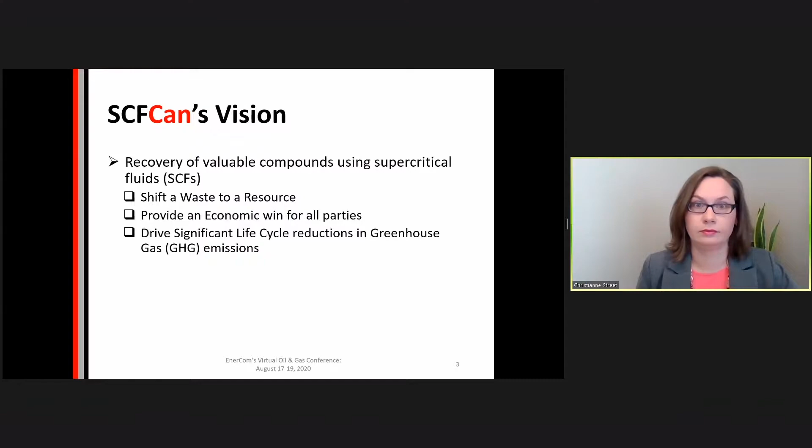I imagine quite a few of the viewers today are comfortable with the concept of drilling waste, but if not, these are the basics that you need to know. So drilling oil and gas wells generates an oil contaminated waste, and quite a bit of it. A typical well would produce around 500 tons of waste containing around 500 barrels of lubricant oil. The lubricant oil is a highly refined product, so has a value of around $35,000 US in the waste of a typical well.

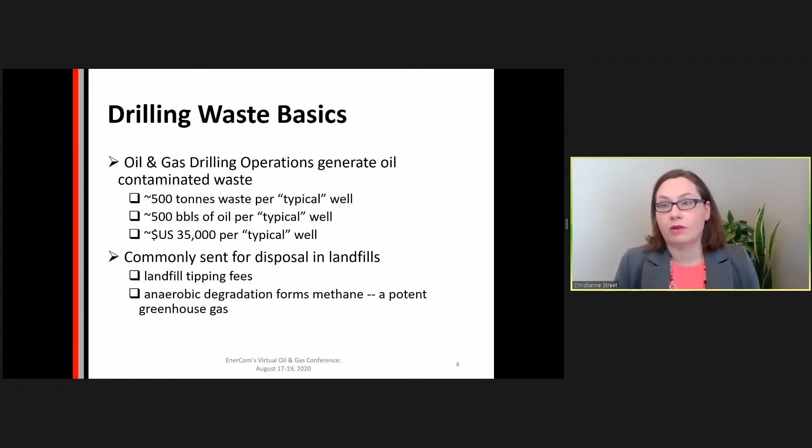Unfortunately, quite commonly, this waste is sent for direct disposal in landfills with no further treatment. So in addition to the loss to the drilling operator of the oil in the waste, they also have to pay landfill tipping fees. And then once in the landfill, the oil is degrading and forming methane, which isn't great from a greenhouse gas point of view.

So SCFCan's technology uses carbon dioxide as a supercritical fluid. So CO2 at high pressure, above about 7 megapascals, and at moderate temperature, so anywhere above about 30 degrees Celsius, becomes a supercritical fluid, which is simply another state of matter, like liquid or gas, but supercritical fluids have very favorable solvent properties.

So we operate our extraction vessel at high pressure, so this would be the high solubility region, and this is where we're extracting the oil from the waste into the CO2. Later on, in our separation vessel, we operate at a lower pressure, and therefore we're in the low solubility region, and the oil drops out so that we can collect it. Our technology has a low energy recirculation cycle, and carbon dioxide is considered safe, inert, and environmentally friendly or green when you compare it to common liquid solvents.

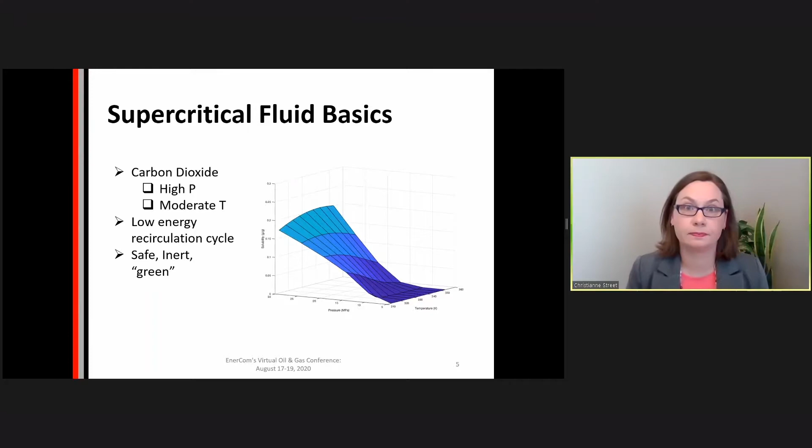I'd like to just show a quick video that explains a little bit more about our extraction process.

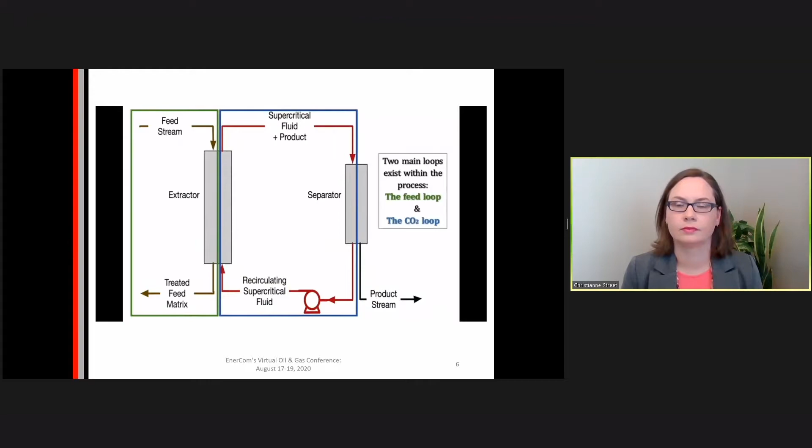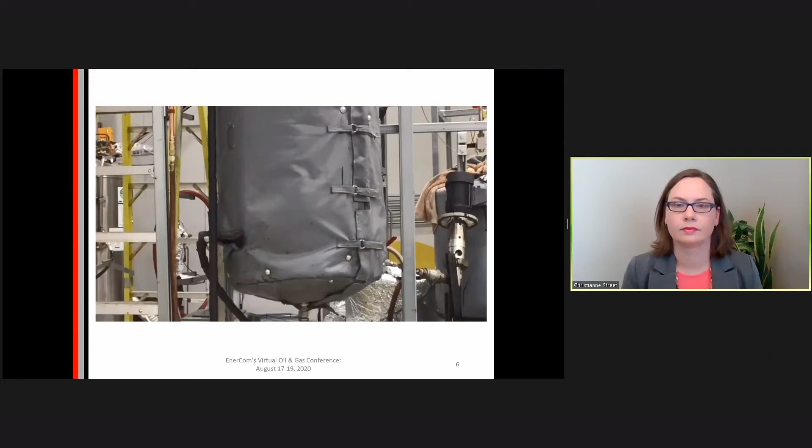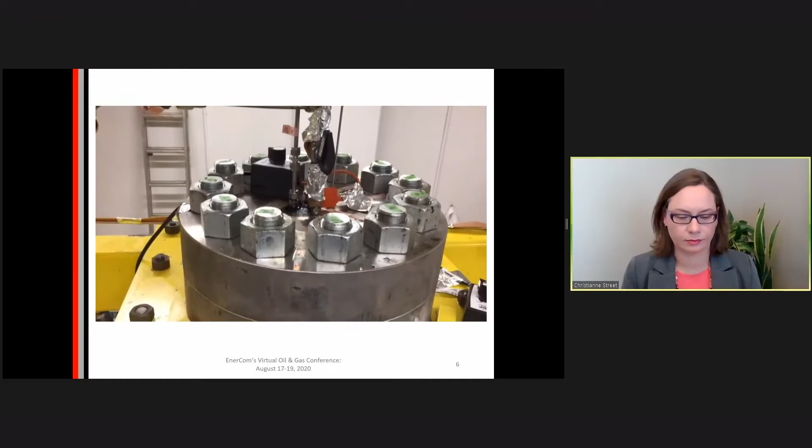The pilot scale fully continuous supercritical fluid extraction process. Two main loops exist within the process: the feed loop, shown in green, and the CO2 loop, shown in blue. The feed loop starts from the slurried drilling waste feed tank. The slurry flows into a positive displacement pump, where it is pressurized and sent to the top of the extraction vessel. The core of the process is the extraction vessel.

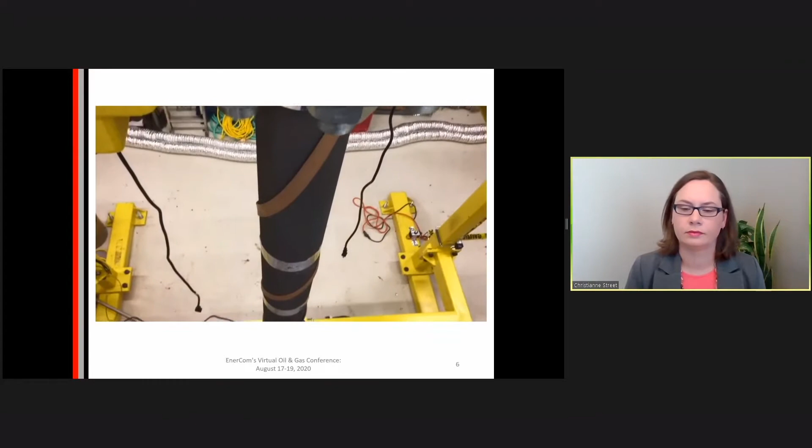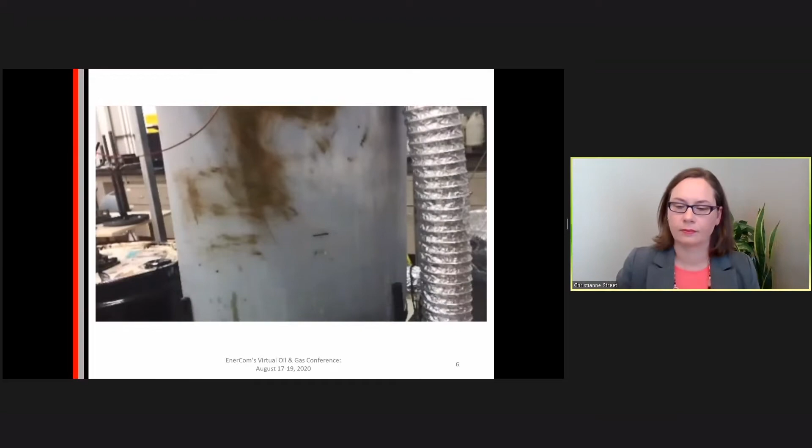It operates at high pressure and modest temperature. Here, the slurried waste flows from top to bottom. The oil is removed from the drilling waste and transferred into the supercritical CO2. At the end of this loop, the clean slurry flow exits from the bottom of the extraction vessel and is piped to the treated waste tank.

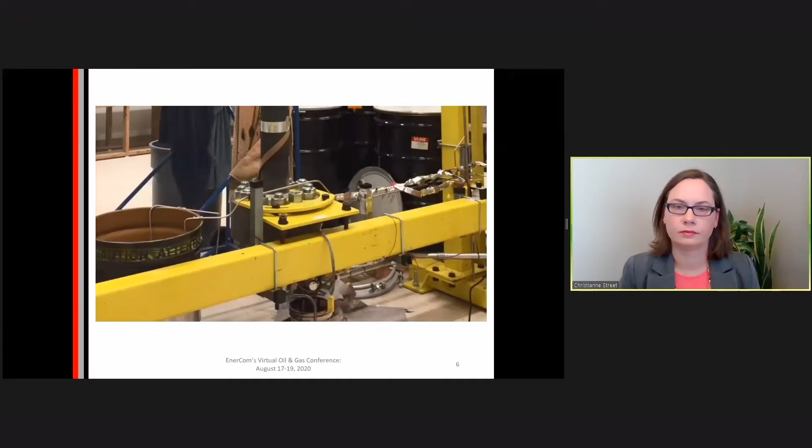The CO2 loop starts from the CO2 feed tank. A positive displacement CO2 pump delivers the CO2 feed to the bottom of the extraction vessel, where it flows up to the top. The CO2 and slurry flow are countercurrent. While the CO2 flows to the top, it extracts the oil. The CO2 and oil leave the top of the extraction vessel and move on to the separator.

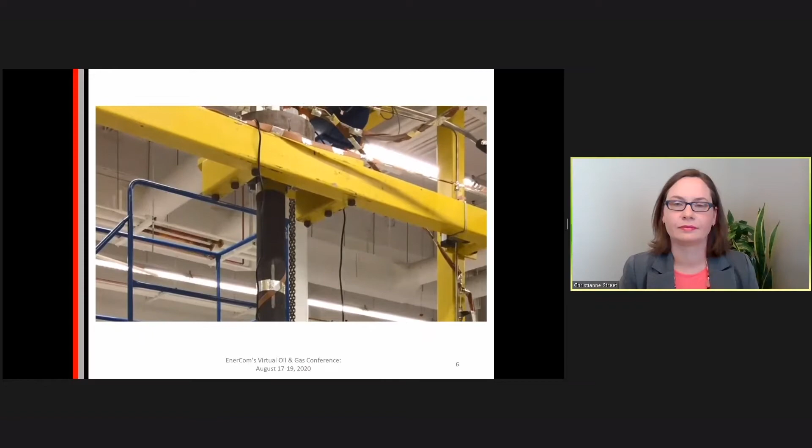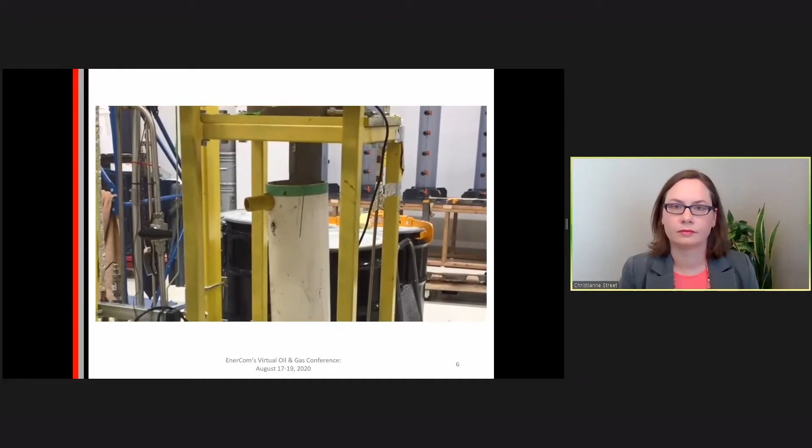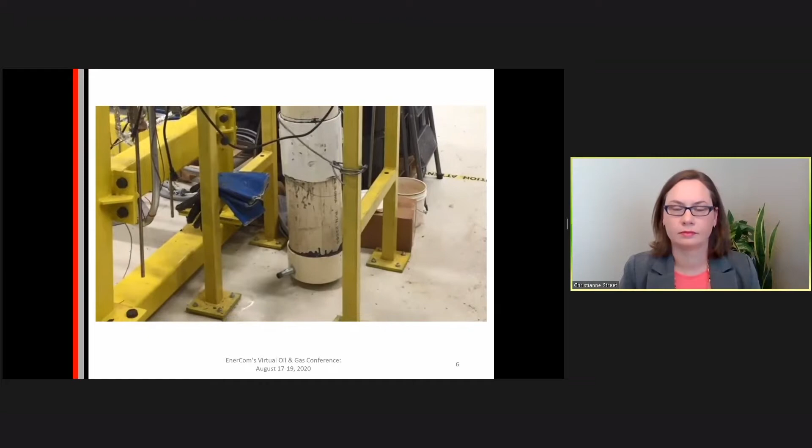The separator is at a lower pressure and temperature compared to the extraction vessel. As a result, the oil condenses out and is collected at the bottom of the separator. The liquid oil can be removed continuously or intermittently from the separator. At the end of this loop, the oil-free CO2 exits the separator, and in commercial applications, it is recycled in the process. The whole system is controlled automatically for safety as well as process stability and performance reasons.

So, to summarize the key points from the video, we have our two loops, the waste feed and the carbon dioxide. They meet in the extraction vessel under high pressure. So again, this is the high solubility region where the oil is extracted from the waste and enters the CO2. The CO2 and oil then flow to the separator. Again, this is the lower pressure side where the oil is dropped out and collected.

What really sets SCFCan's technology apart from other industrial supercritical processes is that we are fully continuous. So we have a continuous feed and removal, which eliminates lost time to fill and empty like you would see with a batch process. Our extractor operates in countercurrent flow, so we have a contact time of minutes rather than hours. And ultimately what this equates to is lower capital and operating costs.

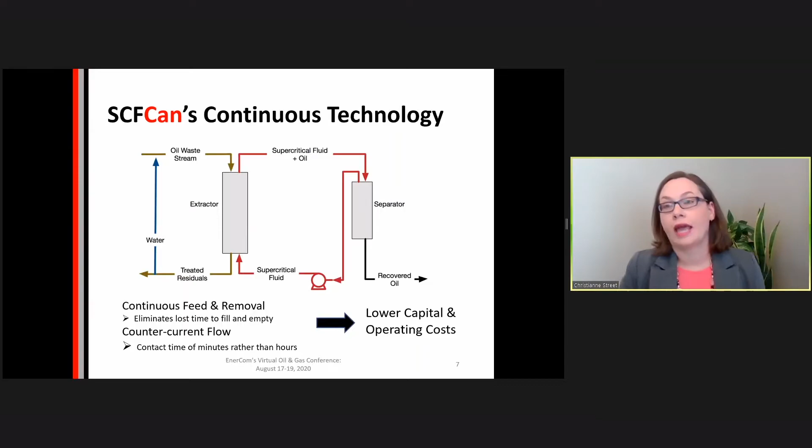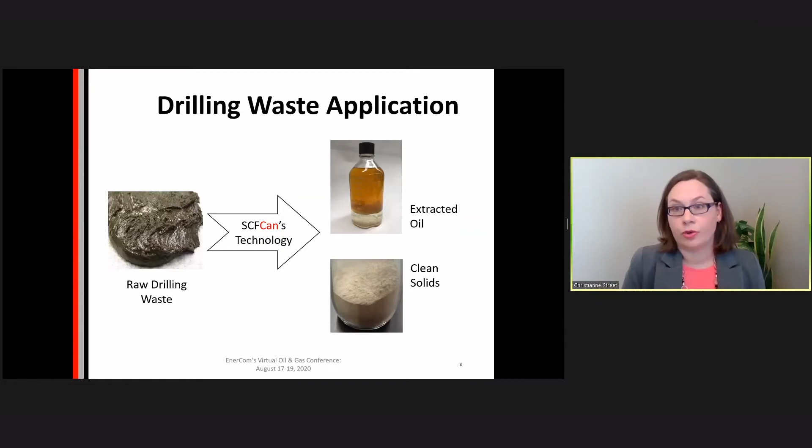In terms of drilling waste, this is what we see. We have a raw drilling waste, which we process with our technology, and we get out the virgin quality extracted lubricant oil and the clean solids. In terms of environmental performance, those clean solids contain less than 1% of the lubricant oil. And what that does is open up the potential for reuse of those clean solids in other applications. And if you compare our process with virgin lubricant oil production and landfilling, our process offers a 75% reduction in life cycle greenhouse gas emissions.

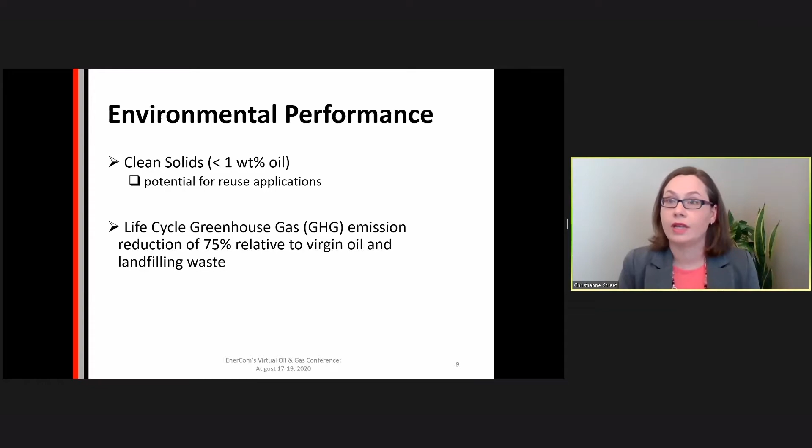I'll now pass it over to Russ to speak to our business model. Thank you, Christianne. In commercializing this technology, we can either take the waste to the technology, or we can take the technology to the waste. These two models are not mutually exclusive. They can be pursued simultaneously in different regions of the world.

In terms of taking the waste to the technology, that would be a regional facility, and there are scale advantages there because the process is fully automated. It doesn't take much additional labor to double or triple capacity. In taking the technology to the waste at a mobile drill site, here you'd have the extraction and recovery units right next to the drill rig, and it provides a tight reuse loop, which allows real integration with the driller, which creates some cost advantages in that respect.

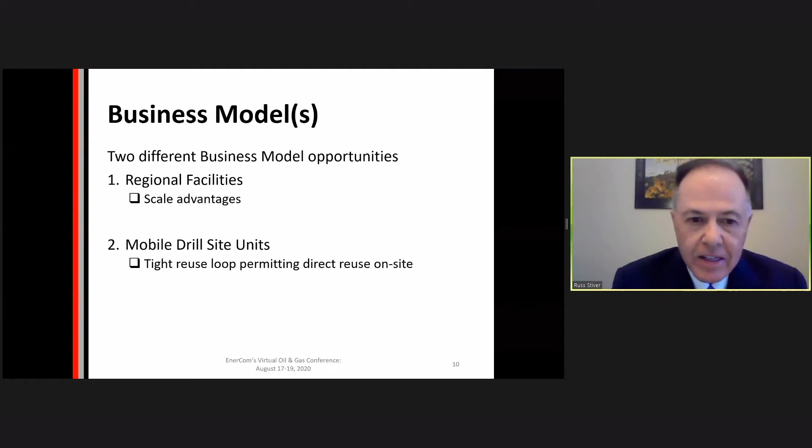This next slide illustrates the economics of our process. You notice two things on the slide. First is that our total cash operating costs are below $40 per barrel, regardless of whether it's the regional or the drill site version. And there's really two components to our costs: labor and utilities. There's not much else to this process other than those two things.

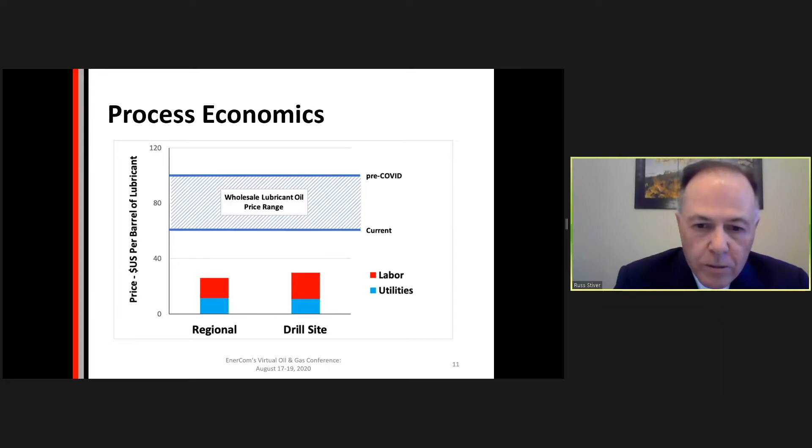Second thing you'll notice is the significant margin or gap between the cash costs that we have and the value of the lubricant oil that we recover, even in the current environment in which lubricant prices are depressed due to the COVID epidemic. We still have a significant margin of profit, which is key because it's this margin that allows us to change the dynamic from one in which industry is asked to subsidize environmental technologies to one in which there's a profit incentive, and we can incentivize drillers to work with us to clean up the environment, provide a profit motive to them, and also provide a great return to our investors.

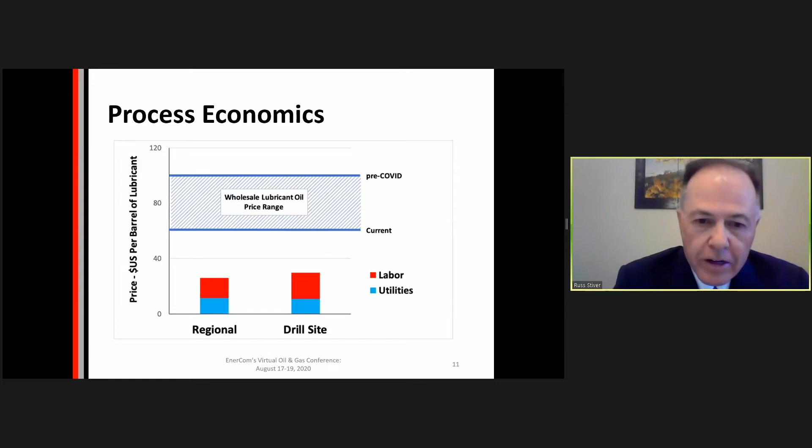In terms of the capital costs to build a regional facility, it's slightly less than $65 per barrel of capacity, which relative to the cash operating margin we had of $35 to $55, $60 per barrel, is quite attractive. You're looking at less than a 2-year payback. For a mobile unit, it's about $100 per barrel of capacity.

The capacities of each of these different operating models: for a regional facility, there's really no limit to it. It's really limited by the number of drilling rigs operating in the area within, we think, about a 200-kilometer radius that are willing to send us their waste. A mobile unit is sized to absorb the waste produced by a single drilling rig, which is around 13,000 barrels of oil recovered annually.

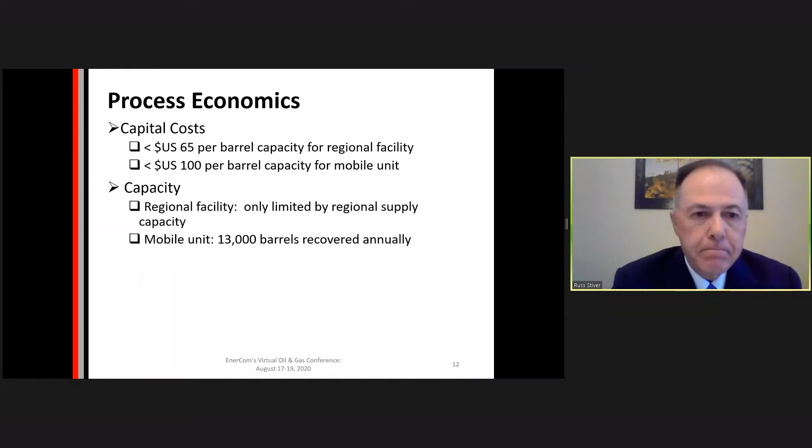Despite the attractive margins, we still think there's upside from there, in several different areas. Carbon credits: the rules vary by jurisdiction, but carbon credits are designed to encourage and incentivize the introduction of technologies that reduce greenhouse gases, and that's really what we do. So we expect to be eligible for carbon credits.

Residual solids reuse: once we've extracted the oil and produced clean solids, we don't think there's a really strong reason why those need to go in a landfill, and we'll be pursuing alternative uses of those. A number come to mind, cement manufacturing, road construction, several things along those lines that those solids could be used for and not go into the landfill. There's obviously upside in lubricant prices from where we are today, which will provide additional profits.

Heat and electricity integration. We've been very conservative in our modeling in terms of how much waste heat we recover. We think there's certainly a lot of upside there in terms of integrating and getting that waste heat and using that to heat the slurry going into the extraction vessel.

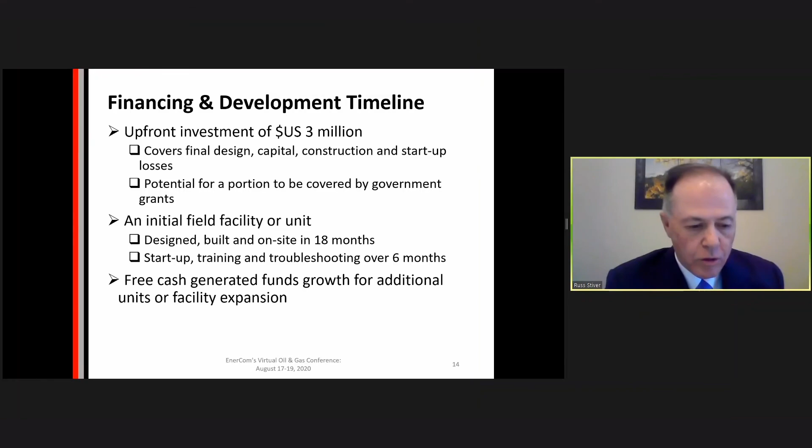Thanks, Russ. So in summary, using SCFCan's supercritical fluid extraction technology, there's a sizable opportunity here for both an economic and an environmental win. We've shown we can recover the lubricant oil for less than $40 a barrel and cut life cycle greenhouse gas emissions by 75%. And in concrete terms, if we applied our technology to 2,400 wells being drilled, we'd be able to reduce greenhouse gas emissions by 1 megaton and recover 1.2 million barrels of lubricant oil that has a value of around $80 million US. So again, a very sizable economic and environmental win with SCFCan's technology.